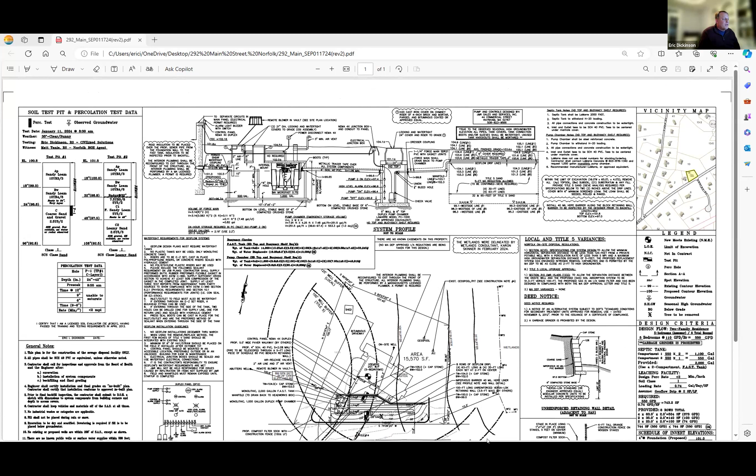Yes, we can. Okay. So this property is a 5-bedroom, 2-family property. It was in pretty bad shape. The new homeowners bought it in hopes of rehabilitating it, which they've been doing until they got shut down, I think, just recently by the building department. But the existing septic system has a cesspool in the back going to a pit and an on-site well not more than 30 feet away from that cesspool and pit. There is water available a little further down the road to the west. I think the very end of that line would be to the property behind this one, which runs along here, the driveway that accesses it.

However, to connect to that water, I looked into it with the DPW. It was $40,000 to $50,000 or something like that. Actually, I think the quote they sent me was more upwards of $80,000. Okay. I think the high end was 96,000. Thank you. All right, great. So that being said, they want to keep the on-site well. So I did the testing in the front yard, trying to stay as far away as possible from that well. The first test pit by the road was very good soil, which is consistent with this area, sand and gravel. The second test pit closer to the house was also pretty good material, but it did have very strong redox at about 32 inches.

So I decided to go with an alternative, an IA system. This is a FAST GeoFlow system. It requires biannual inspections. It's basically a mini wastewater treatment plant. I did not take any offsets to groundwater. It's 5 feet to groundwater. But it does come with a size reduction. The system will have a wall around it, right here, a Versa-Lok wall, to maintain access to the 2 front doors of the property.

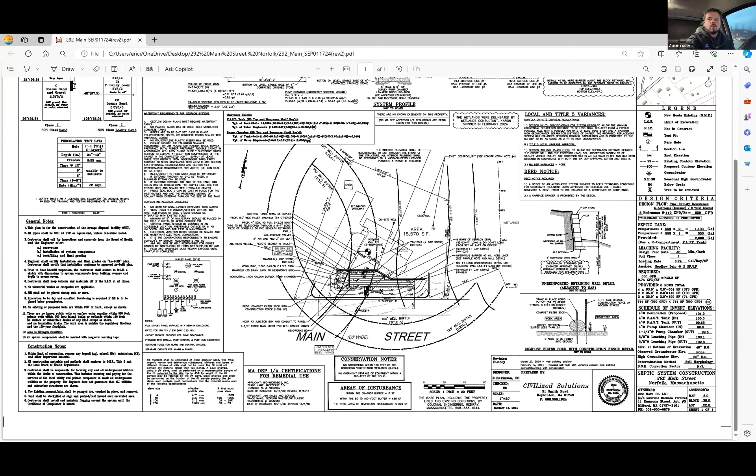Okay. I'm the owner of the property. I'm just driving because there's a lot of traffic here on the train line, and the traffic center was crazy. That's the reason I was late 12 minutes, but I'm here. Okay.

I don't see any hands raised or comments from anybody in the audience. Okay. Well, if there's no objections, take a vote.

Did we lose Liz? I don't see her now. Nope, she's there. I'm here. Oh, sorry. I'm sorry. You were at the top on mine too, you were at the top until...

Okay. Anyways, so if we can get a motion for accepting with the two waivers. I'd like to make a motion to accept the two waivers at 292 Main Street. And I'll second that. Okay. All in favor, say aye. Andy Bakunowski, aye. Liz Gephardt, aye. Kristy Burns, aye.

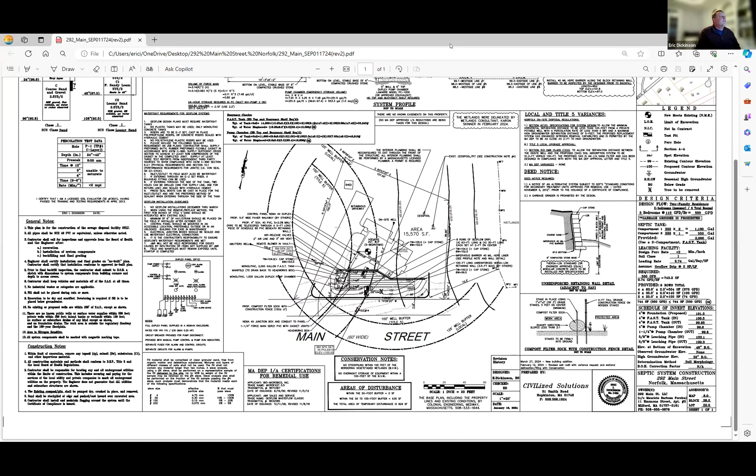All right, John, we got one more minute, I think. Sit tight, John. Then we do the variance hearing for 50 Mirror Lake Ave.

Okay, you're all set to go ahead and open that hearing. Okay, 7:15, opening a public hearing for 50 Mirror Lake Avenue. This is a request for 4 variances, and in accordance with our preamble, a variance hearing from the Board of Health Regulations is called to order for 50 Mirror Lake Avenue.

It is my duty to inform you that you will have to provide the Board of Health with data to support your request for a waiver of Board of Health requirements, and that if you do not receive the waiver, it will do you manifest injustice. You will have to show that what you intend to do is environmentally acceptable. And John, you have the floor.

Okay, Mr. Chairman. So number one, I don't have that plan on this computer. If somebody has it and wants to put it up, that's fine, or else I can just explain the project to you. It's fairly simple. 50 Mirror Lake Ave obviously is on Mirror Lake Ave. It is not on the lake side. So we're not abutting, thanks, Betsy. We're not abutting the lake. We're on the other side of the street.

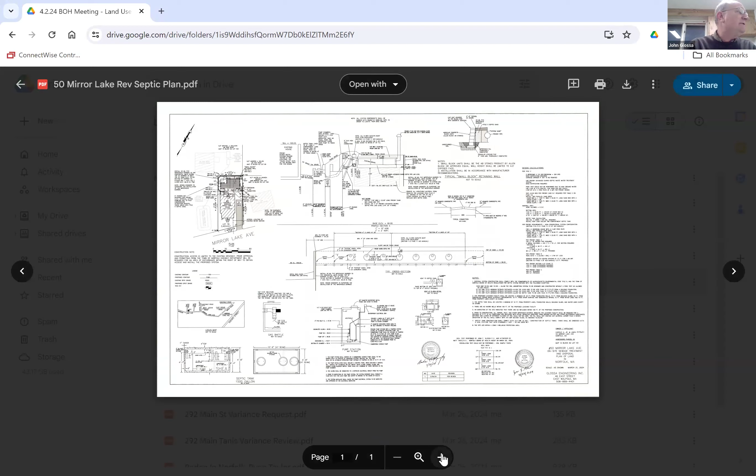But what we do have is a tiny lot. The lot actually is 3,403 square feet. And so we have sort of abutter issues. So to that extent, and as required by Title V regulations, I notified the three abutters that you can see on the plan, the one to the right, the one to the rear, and then that one that just touches in the right rear corner.

I also sent them full-size copies of the plans, and I also met with the abutter who's probably most affected by this property, which is Mike Sullivan at 4 Pine Road, the property right behind 50 Mirror Lake Ave. So there is a failed cesspool at the back of this property. And I went out with Matt.

We did soil testing. The water table this year was quite high this spring. Not able to do a perc test there. We did a sieve analysis. I bring it to Thielsch Engineering, a Boston engineering firm who does soil testing as part of their service to the community. I actually bring the samples down to Cranston, Rhode Island, where they have a lab. They do all of my testing.

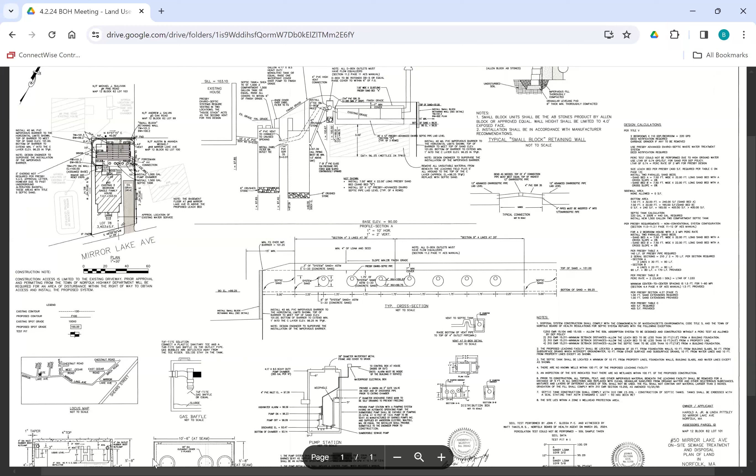Mr. Sullivan, as you're the abutter, do you have any comments, concerns, observations, anything you want to say? No, I think I'm all good. Thank you. Thank you for putting in all those notes and working with us. We appreciate it. Okay.

Actually, just last comments? I do have one last thing. Mr. Sullivan's septic has his tank and pump chamber in the back, and then there's a force main that goes up along the side of the property to the SAS that is shown on the plan. That force main does come relatively close to the property line, which is another reason why I really want those property lines to be marked out prior to construction, so that way there's no issue that it may be struck accidentally. So that's my only other comment.

Yeah, if I may, Mr. Chairman, that makes all the sense in the world, because the last thing we want to hear is that the installer ripped out Mike's force main. As you can see on the plan, his leach field is to the left, but you can see his septic tank and his pump chamber right behind this property. And as Matt said, his force main runs pretty close to the lot line. So good idea, have the lot line staked, that's a good condition. And then the pre-construction meeting so that both Matt and I can tell the installer to be careful. Go easy over there, because we don't want that.

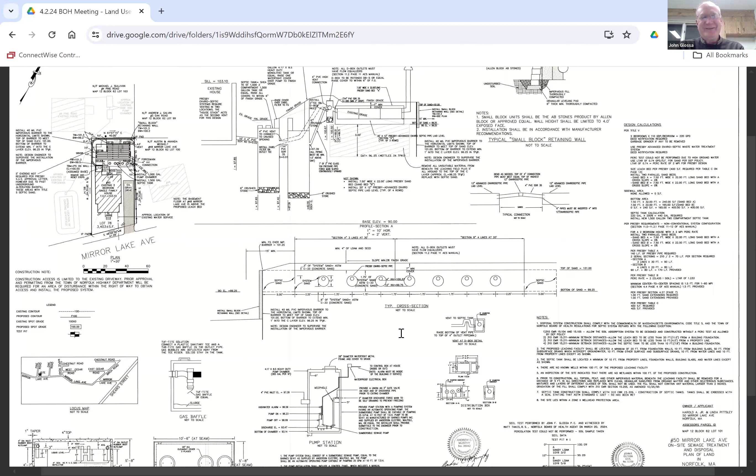Okay, if no further discussion of the board, we can get a motion to approve the 4 variances for 50 Mirror Lake Avenue. I'd like to make a motion to approve the 4 variances at 50 Mirror Lake Avenue. Second. Okay, and all in favor say aye. Andy Bakunowski, aye. Liz Gephardt, aye. Kristy Burns, aye.

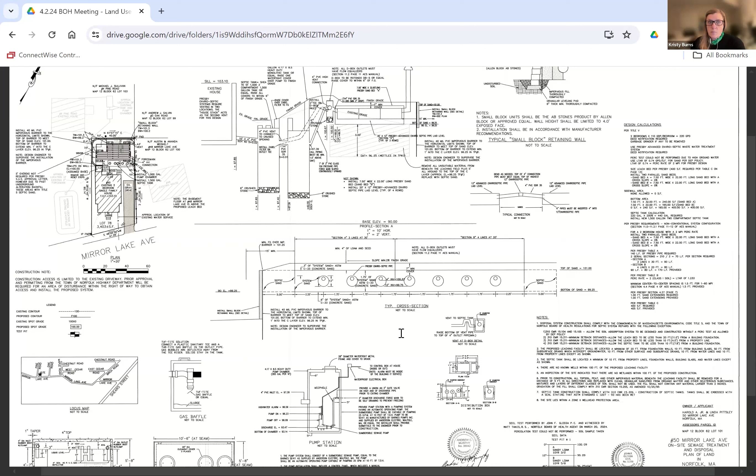Okay, all right. Thank you, Mr. Chairman. Thanks, everybody. Thanks, John. Thanks, Betsy. Thank you, John. Okay, we'll see you. Okay.

We have an appointment with Mr. Taylor. I believe he is going to be talking about radon in his Norfolk presentation. And Ryan, if you could, give a little bit of background on the project, how you came about to it, who you worked with, why you did this, what were you thinking? It's a common problem in Norfolk. I know that, but I'd be interested in hearing what you were thinking, why you chose the project, and what's the next step. So you have the floor. Oh, all right, great. Thank you.

Well, so at King Philip, which is where I go for high school, senior year, you can do a project to graduate with a distinction in STEM. So I chose to research radon in Norfolk because I remember back when I lived near Warren Drive, where the Fox Run development went in, they unearthed a lot of ground, and that caused a lot of high radon in our area. So our house had to get tested. So I wanted to go back and test some houses around Norfolk to see what the levels were.

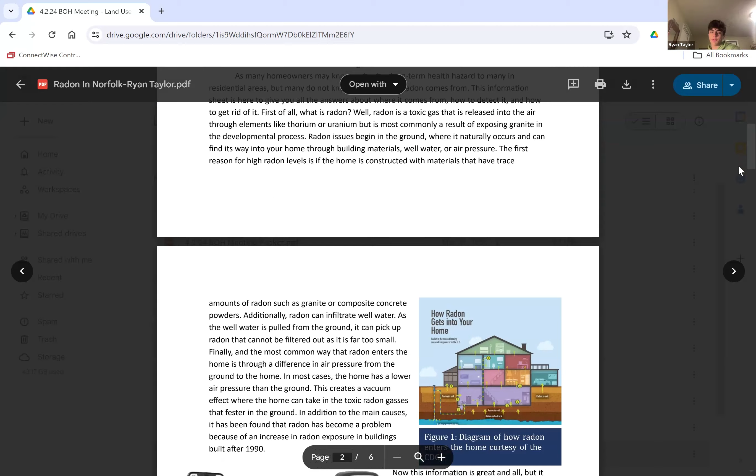Okay, do you want to go over the data for the other board members, or have the board members looked at this presentation? Yeah, sure. So I did 5 tests around Norfolk. If you scroll down the fact sheet, it should be there. They were at-home tests, like the kind you can get at Home Depot or Lowe's. They're not super expensive, about $15. And 3 out of the 5 houses that I tested were over the EPA's radon recommendations.

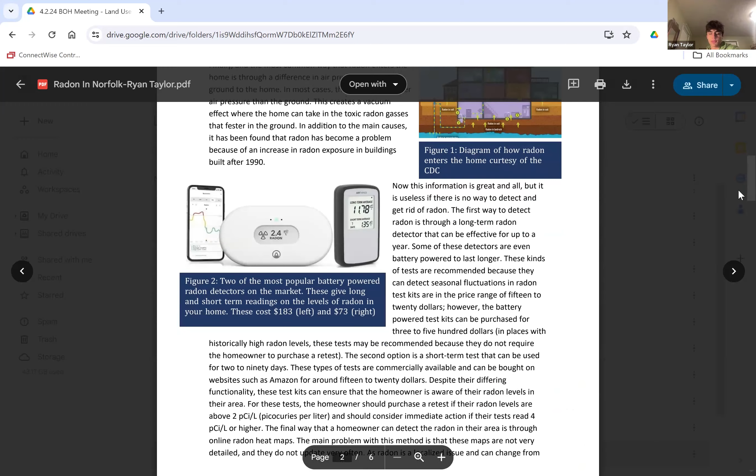If you go down a little more, it should be like a chart. Here you go. Here's the locations I tested, the relative areas. Locations E, D, and C were all higher than 4 pCi/L, which is the level of radon in the air in your home. So 3 out of the 5 locations had over the dangerous amount, and E and D had over double the amount. So I thought that would be really important to showcase. If you scroll down a little bit more, there's a chart. I made a little Excel sheet with some of the data.

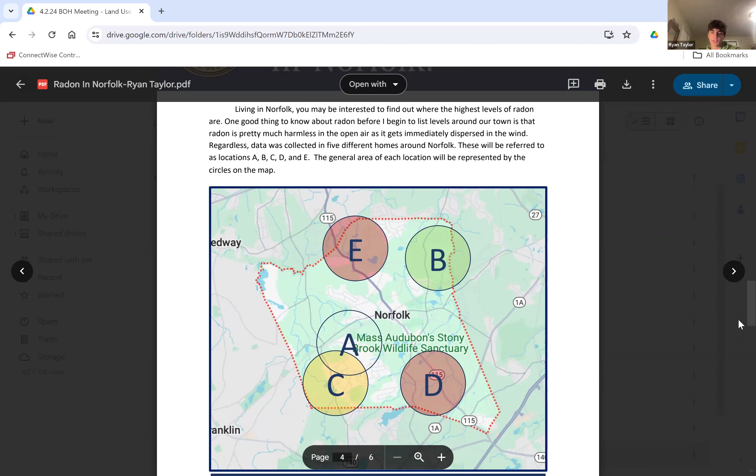just a way of extracting radon from a specific area in your house. Usually it's just your basement. And it still had a relatively high level regardless. And locations D and E were unfinished basements that still had high levels. So I sent these tests to the lab, and what they sent back was essentially a bunch of tips on how you can get rid of these. Most of them involve hiring a contractor, getting your houses tested regularly, and usually installing some sort of mitigation system.

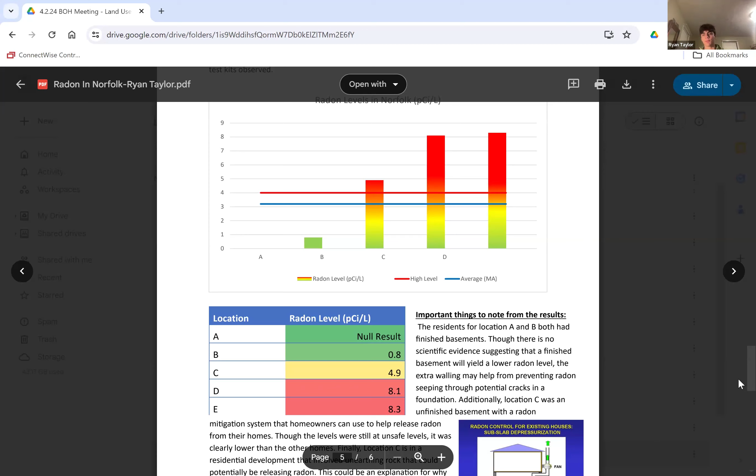One thing that the EPA and the CDC does note is that some mixes in the foundation of your home can have an effect on the radon levels. So when you're looking at a house that has a different mix of concrete, that can vary, it doesn't necessarily have to do with the age of the home. It can just be related to something like the granite content or any materials that might allow something in the ground to leak into the house.

I know one of the homes had, I think, like 8.3 was what it returned. And on their foundation, you could see there were smaller holes or cracks, which is a huge reason why a lot of radon leaks in. And that house was pretty old. I think it was constructed about 50-ish years ago. So

I know you didn't do water testing as well, but did that thought cross your mind? Obviously if they're on town water, they wouldn't necessarily have radon, but if they had their own private well, and if that was tested, and also the air, was that something that you thought about doing? I know the testing is fairly expensive, but was that a possibility in terms of the study?